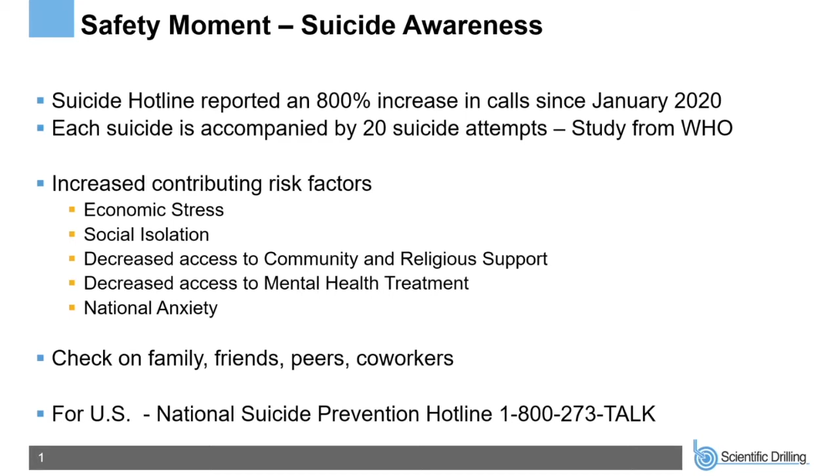Scientific Drilling's MWD engineering and manufacturing support occurs primarily at our Applied Technology Center in Paso Robles, California. Halo Rotary Steerable Technology is supported by our guys in the Celle Technology Center in Germany. Contributions from that team are also being made towards Scientific Drilling's next generation MWD tools. Our engineering group includes electrical, mechanical, software, and firmware engineering teams, and they work hand in hand to fully conceptualize and deliver the exceptional equipment that you've seen from Scientific Drilling.

Upon commercialization of MWD equipment, these teams ensure our full manufacturing capabilities continue to meet the quality demands that our field operations group needs to deliver exceptional service quality. In the event of a tool needing diagnostics testing for customer reporting, we have full diagnostic capabilities to determine the exact root cause of failure down to the circuit board and sensor level. In an upcoming slide, we're going to talk about

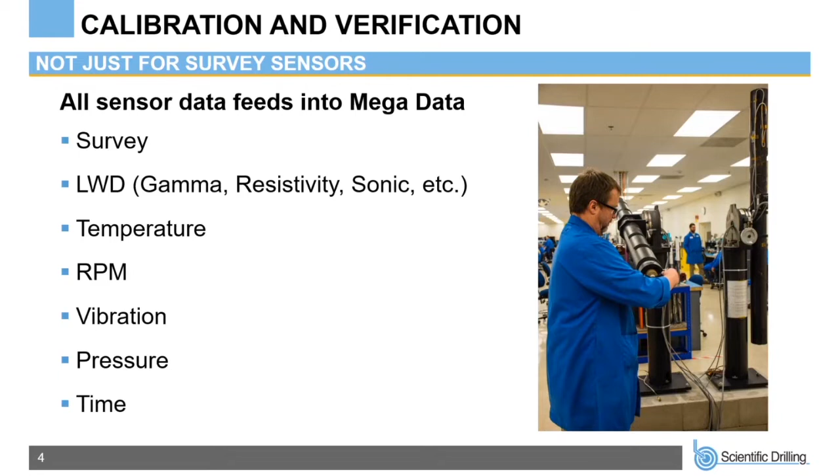Introducing continuous improvements while increasing tool reliability realistically doesn't go very far, in my opinion, if we're not performing proper training. Keeping and improving reliability heavily depends on thorough training. Having an in-depth knowledge of the full inner capacity of our tool components, Scientific Drilling's training department is completely involved with product line teams and key support groups to continuously update course development.

Training courses are designed from work instruction documentation, which is also continuously updated and distributed to ensure best practices are followed. Initial operator training focuses on safety, tool maintenance, calibration verification, tool running best practices, and communication.

Communication should be focused on for a minute here, as this pertains to daily feedback about tool performance to the district, updating rig site timelines for coordinating efforts, but more importantly, the need for communication and acknowledgement from the well site leader and driller on the rig site about improper tool use that could lead to any type of tool malfunction.

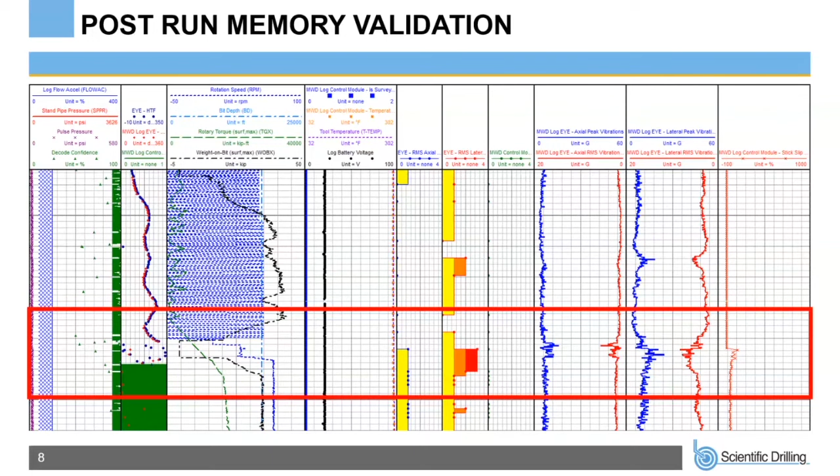This slide details the vibrational levels seen during the transition from sliding over to rotating. It basically indicates a need to mitigate the unnecessary vibrations during the transition. That way we're preventing damage to the BHA and MWD components. Comparing the memory data to the real-time levels pulsed up to surface details the validity of the levels pulsed to surface, and it also increases the data density for insight to the cause and mitigation of the vibrations.

In the event of a tool not performing adequately, or if any of the other components were subjected to out-of-spec conditions, Scientific Drilling's in-house non-conformance reporting system, named Bullseye, is used to initiate an NCR out on location, and then it's also used to track the NCR through the entire process, from root cause identification all the way through customer report generation. The information collected through this process is also used in sustaining engineering efforts, and it's used in the client review process. The Bullseye system is consistently monitored to maintain workflow and reporting time efficiency.

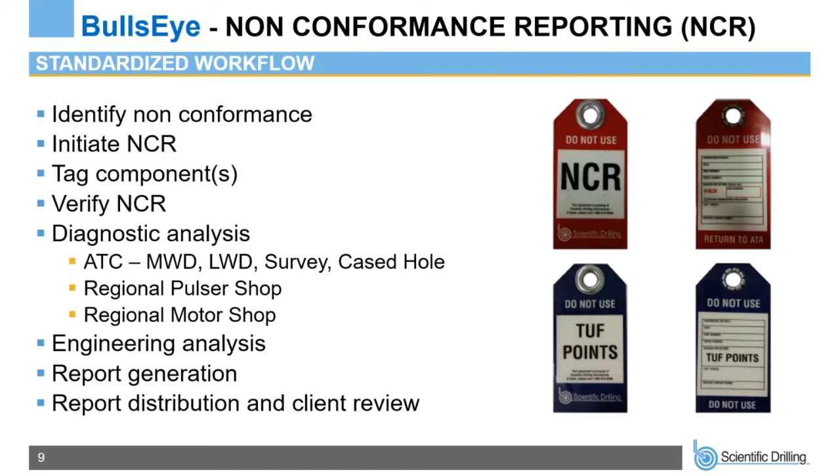Upon completion of the well, Scientific Drilling's data model file will be uploaded to its cloud-based server known as Central Data Model. This system not only permanently stores all of the real-time and memory data, but it also mines the data to apply TUF points to the tools which were used downhole. TUF points, as you can see, is labeled as tool utilization factor. And it's also a proprietary environmental-based condition system to determine a maintenance cycle to electronics. So basically, we're establishing a life cycle to the electronics. This maintenance cycle eliminates downtime and it increases productivity by not running a tool until it fails.

The point-based system establishes thresholds for individual tools, and it applies a multiplier of points based on the exposed vibration, temperature, and stick slip levels. The higher the levels, the faster they accumulate points. Upon getting close to this threshold, districts receive an email every Sunday indicating which tools are within 75% of the threshold. That way they can start to plan for a fresh replacement of the tools. These tools are identified as nearing the end of their life cycle, and they're sent in to Scientific Drilling's manufacturing facility, and then they're rebuilt to a new status.

Scientific Drilling's regional diagnostic program empowers each operator on site and at districts with the ability to perform a full maintenance analysis on each component within the tool string. Operators and shop technicians have step-by-step instructions to perform electrical continuity tests, electrical insulation testing, contact band pull testing, and these tests, of course, involve verification of calibration for any sensor packages within the tools.

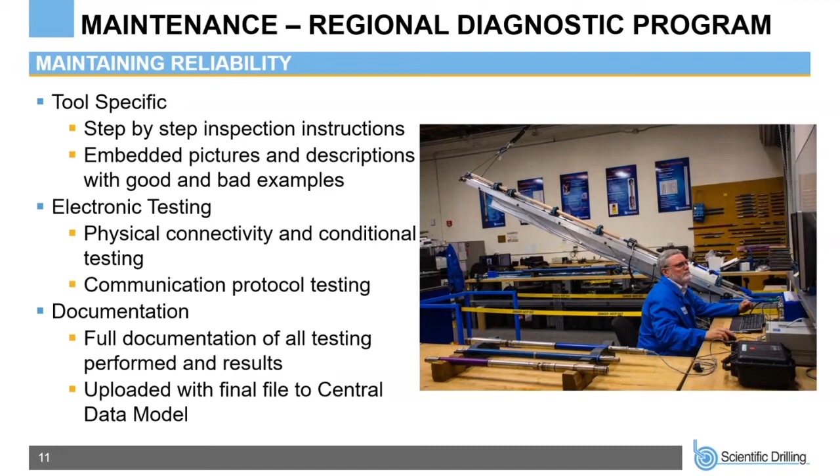So quickly reviewing what Scientific Drilling consistently performs to increase tool reliability, each item has one main contribution that it relies on, and that's good data. Good data results in reliability. Reliability results in cost effectiveness, and cost effectiveness results in profitability for everyone involved.

Using the standard practices and procedures we discussed in this short webinar, Scientific Drilling has increased its reliability and its success stories. While drilling conditions constantly change to drill faster with increased challenges, we are and will continue to improve reliability using Scientific Drilling's 50+ years of engineering and service delivery experience.

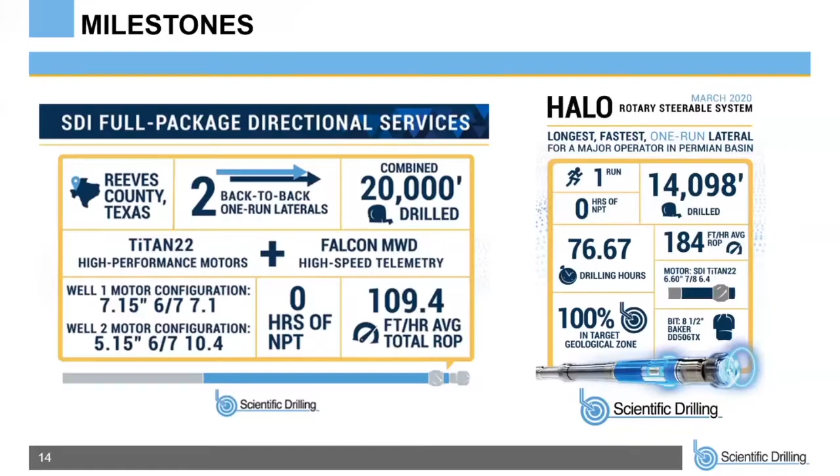So over the past year, our sustaining engineering group, along with our pulsar technicians, have been working hand in hand to redesign the inner workings of the pulsar. Our pulsar is a self-compensating design. It doesn't require any calculation of a poppet or an orifice. We have 5 different pulsar sizes, and we took the 2 main pulsar sizes in that area and redesigned the inner workings, the flow area, and changed out some of the materials. And we went from having about 25 failures a month for a short period of time to 100 plus days with no trips for failures.

And since this was released March 20th, that is still the only failure that we've had in the Permian Basin. As of today, we're still ongoing since that one failure. In my book and in anybody else's book, that's a pretty impressive stat. Definitely. I think as of today, it's 149 days with one failure, and up in the New Mexico, Colorado area with our EM tools, we're getting close to 250 days without a failure. So that's some good reliability showing through.

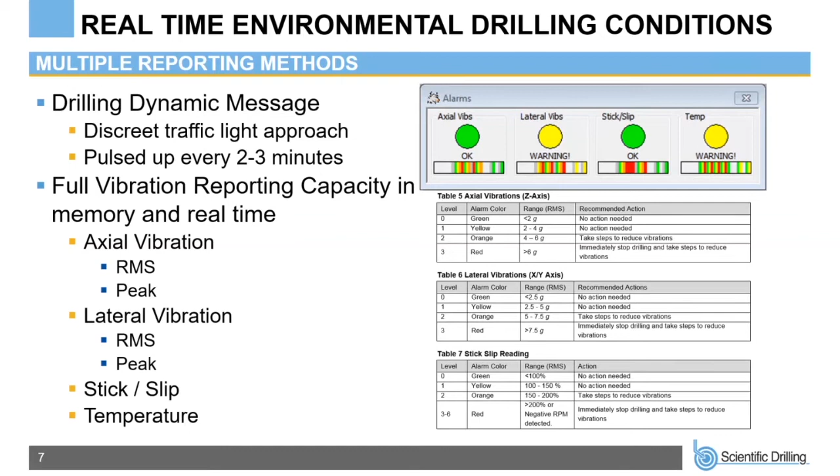And then right underneath each traffic light, this little bar right here represents the past hour of what was going on for stick slip, temperature, and any of the other readings on there. One of the other recent innovations and improvements that we've made to the software as well is if you do start to have some kind of issue, let's say you start getting a communication error or some type of bus line error, the readings that are pulsed up to surface, if it's an erroneous error of some sort, will actually be highlighted in orange or red, depending on the severity of the error itself.

And then one final thought on that is, as far as the networking and such, typically you have one decoding system doing this, and then you have another software package doing the survey calculations, and another package doing the logging collection and such like that. Our system is all in one. It utilizes one server. It's all tied together. There's no putting a survey here and then typing in another survey into the logging system. It's all derived from one point, one location. So one entry is all it takes, and that's driven its efficiency as well.

Thanks, Ken. The next question here from Ty. Does your pulsar operate off of positive or negative pressure pulses? It's a positive pulse system. Yes, it is. Okay. And can you please explain TUF points a bit more? Is the TUF points based on pumping hours? Is the tool pulled off service once the TUF points are reached?

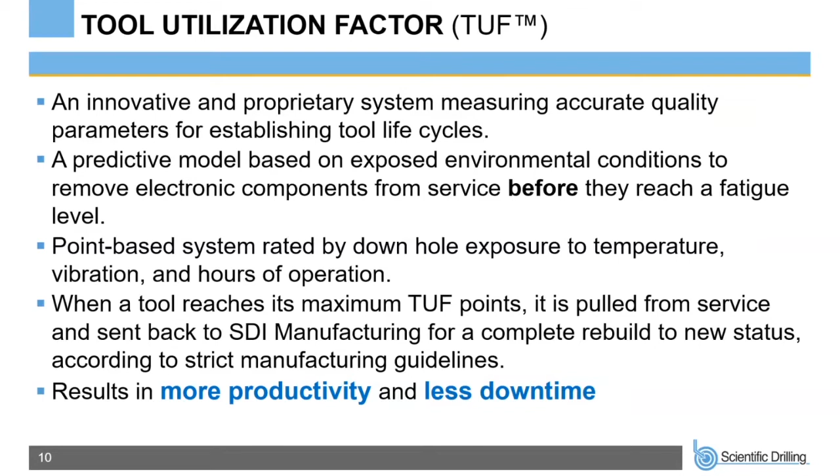Right. And I know you mentioned the places that we're being successful with EM. What are we doing to try to get EM to work in the Permian? So we've actually had great success with EM in the Permian over the past year with our EM deep receiver. We do have an EM deep receiver that gets placed into an existing wellbore.

We prefer non-producing. We can do producing, but of course with safety and exposure to operators and stuff like that, we do prefer non-producing wells. But we've had great success in the Permian Basin. We've done it in the Bakken region as well with a few clients with tremendous success.

Great, thank you. Another question from Ty. He wants to know if our pulsar can handle both magnetic and gyro MWDs on the same BHA. Absolutely. Anytime we run gyro MWD, we also have a magnetic sensor package in there as well. Any MWD tool string that we run, whether it's Mud Pulse or EM, will always have a magnetic survey package within it.